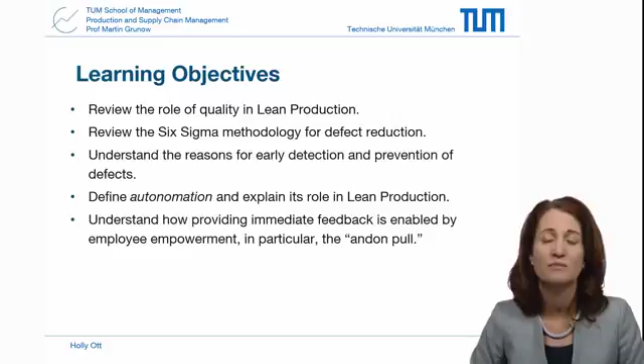The learning objectives are to review the role of quality in lean production and to look again at the Six Sigma methodology for defect reduction. We want to understand the reasons for early detection and prevention of defects, define autonomation and explain its role in lean production, and finally understand how providing immediate feedback is enabled by employee empowerment, in particular the andon pull.

At the beginning of this course, we discussed how lean production tools are used to reduce the three M's: Mura, inconsistencies; Muri, overburden; and Muda, waste. And we discussed how the objective of these lean tools is to create continuous flow in our processes, increase the flexibility to match customer demand, and eliminate waste through quality and quantity control.

We've learned to establish continuous flow in the face of setup times and variability, and we've used pull scheduling techniques to achieve just-in-time production. All of these are geared towards quantity control. In this lecture, we will look more closely at quality control and how this affects our process.

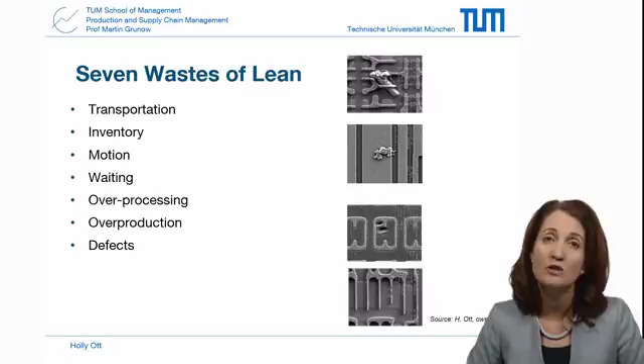We'll start by going back to our 7 wastes of lean: transportation, inventory, motion, waiting, overprocessing, overproduction, and defects. Thus far, we've looked primarily at our production in order to reduce inventory and waiting. Now we will look more closely at our last waste, defects.

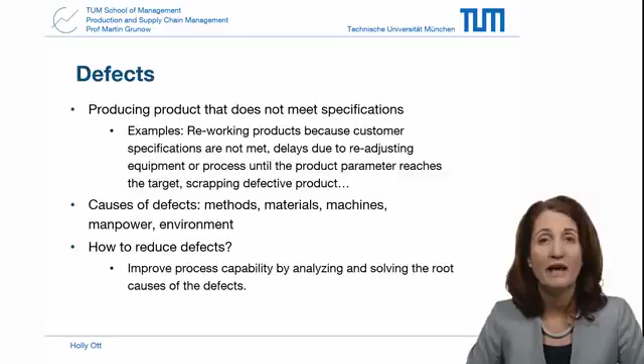Again, defects means producing product that does not meet specifications. Causes can be the methods we're using, the materials, the equipment, the operators, the environment. How can we reduce this? Well, we can improve process capability by analyzing our process and solving for the root causes of the defects.

Without recapping the topics of the first two courses, we know that Six Sigma does exactly this. Six Sigma tackles defect reduction by identifying the critical to quality output parameters, which we called Y, and identifying the factors that influence or affect these critical to quality parameters. We call these the X influencers.

Then, following our DMAIC cycle — define, measure, analyze, improve, and control — we would measure the variability of our critical to quality parameters. This was represented by Six Sigma, 6 standard deviations of that normally distributed parameter.

We would see how this compared to the allowed specifications, the lower and upper spec limits defined by the customer. Then, through analyzing the data and running experiments to improve the process, we would reduce the variability so that we would have a much more tightly controlled process, improving the capability of the process and reducing the number of defects. Defined by Motorola, a process achieving 3.4 parts per million defects has a Six Sigma capability.

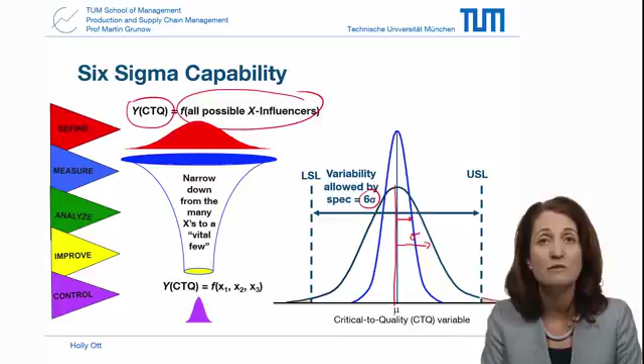Then finally, as part of the Six Sigma methodology, we would control and monitor our process. Now, why was this Six Sigma capability so important?

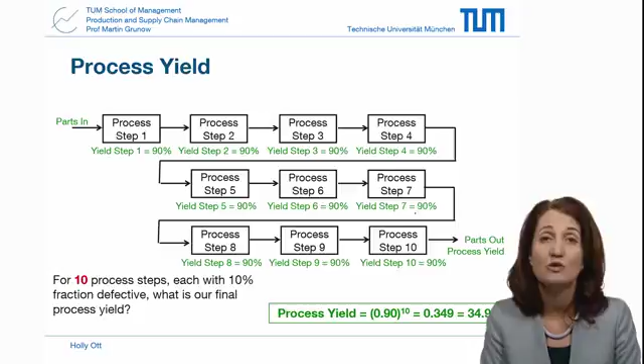Well, we also learned about process yield, and we saw that a complex process with many steps can have unacceptably low yields, even for fairly high yields at each individual step. For a product like a car with thousands of parts and processes, the Six Sigma capability is required even to achieve a reasonable final yield.

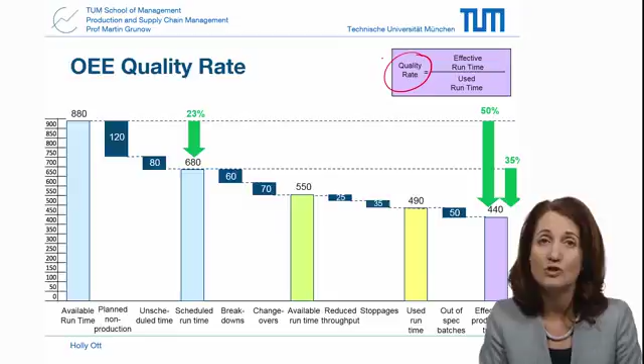We saw this again in this course in the overall equipment effectiveness lecture, so that the yield is measured as part of the OEE, where we look at the availability rate, the performance rate, and here, the quality rate. The quality rate is reduced then to losses due to quality issues, rework and scrap due to defects.

We also understood the effect of defects not only as a loss of this production yield, as this quality rate, but also as a loss of resources in our production: materials, labor, and capacity. The cost of these internal failures include the cost of scrap and rework and delay of deliveries.

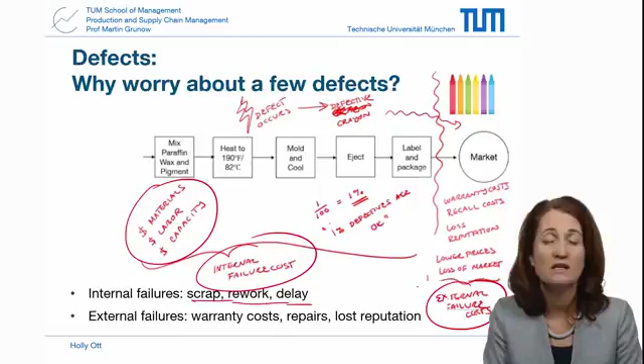Defects can also lead to external failure costs when the defective parts reach the customer. This can cause possible recall, warranty costs, as well as reputation loss.

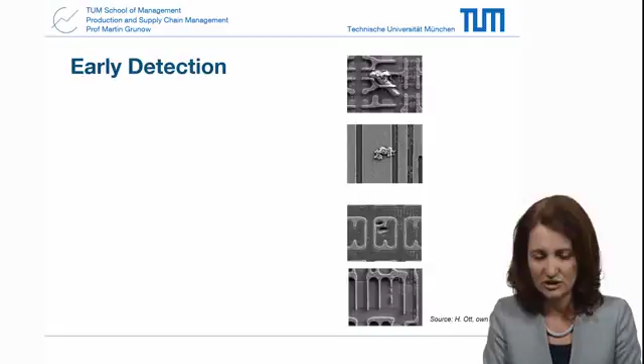Now, defects are not easy to detect. They're often very hard to measure when they're very rare and have many different root causes. But already we can see that early detection is better than late detection. Now why? If a problem is detected early, the number of defects can be reduced and the internal failure costs can be reduced.

Here we want to see how this works when we compare a push and a pull system. Now remember, in a push system, inventory is allowed to collect between the steps. So for example, if step 1 is producing good parts,

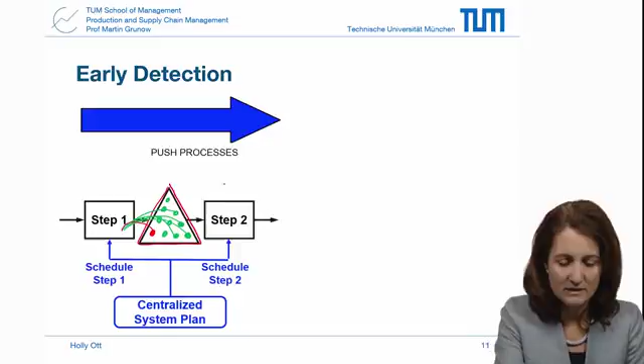but the inventory is allowed to build up between step 1 and step 2. It continues to process its good parts, and then it has a problem. Step 1 has a problem, and it produces a defective part. Now, in the best case, you'll detect this defect at step 2. But because there's so much inventory built up between step 1 and step 2, all of these good parts have to be processed before the defective part will move to step 2 and the defect will be detected.

So time is going by. And while this time is going by, what is step 1 doing? Well, it's got a problem. No one knows about the problem. So it is busy filling up this inventory buffer with defective parts, which then also have to be flushed out through the system.

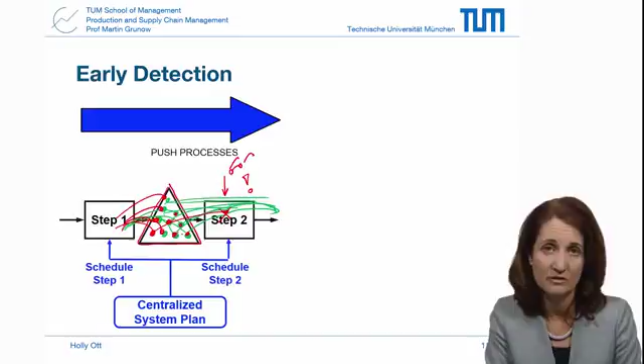Now, in contrast, in a pull system, the inventory is limited, as we saw with Kanban cards, with limited inventory between the steps. If an activity producing starts to produce a defect, the time till detection will depend on the amount of inventory between the steps. And since this is limited in a pull system, the detection will occur much faster.

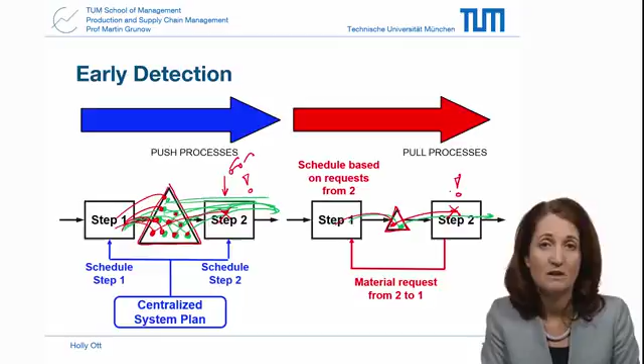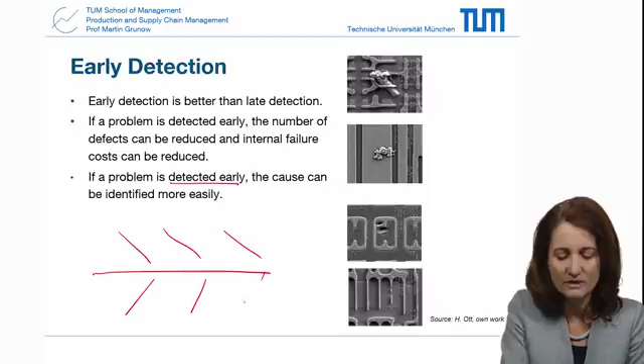As we said earlier, if a problem is detected early, then the cause can be identified early. Why? Because as we saw in course 2, when doing cause and effect analysis, for example a fishbone diagram, the inputs are limited to those processes preceding that detection. So if it's identified more quickly, you can more quickly see what went wrong in those processes.

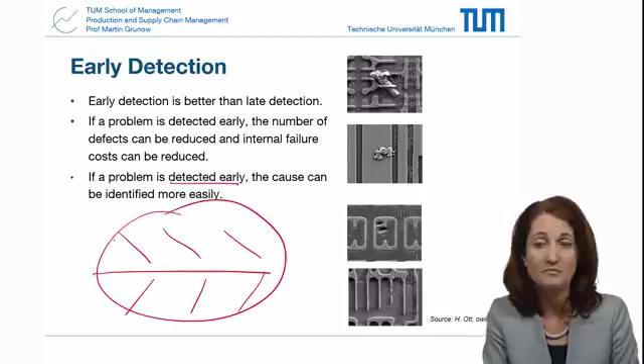But of course, prevention is better than inspection. Why? Inspection adds non-value-added costs and capital, and it doesn't remove the cost of scrap or rework. Inspection is never perfect; defects can slip through and cause external failures. And importantly, inspection removes the responsibility, because finding the defect doesn't occur where it happens—it's downstream from the actual problem. Inspection itself can also become a bottleneck in your system.

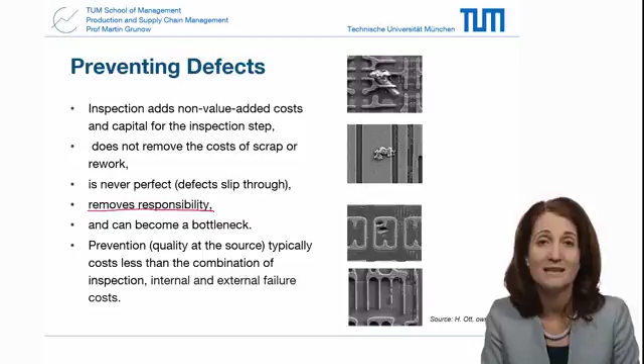Better is prevention, quality at the source. Prevention typically costs less than the combination of inspection, internal and external failure costs. So how can we achieve this? One of the most well-known tools of lean production are built-in tests that signal problems automatically and immediately.

This brings us to the topic of autonomation. As we said in the first session, Toyota Motor Corporation grew out of Toyota Automatic Loom Works, founded by Sakichi Toyoda. A particular feature of the looms was that they would stop automatically as soon as a thread broke—in other words, a defect would stop production immediately.

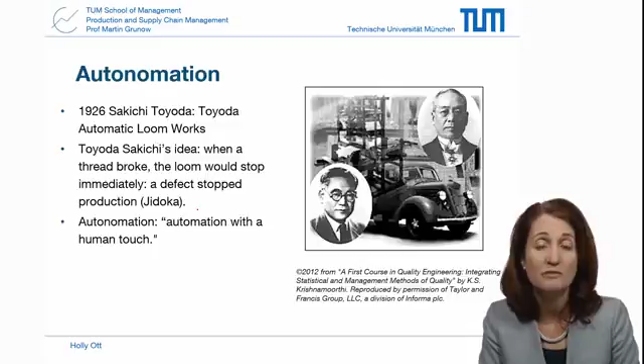This affected the principle of jidoka, or quality at the source, described by Taiichi Ohno as autonomation, or automation with a human touch—meaning a machine could distinguish between normal and abnormal operating conditions. If something went wrong, the machine would stop immediately and no defects would be produced. This emphasizes the idea of waste: with no extra inventory to hide the problem, it would be visible, allowing immediate improvement of the process.

Just a note: this is very different from our Six Sigma idea of reducing variation. Here, in lean production, no defects are even produced.

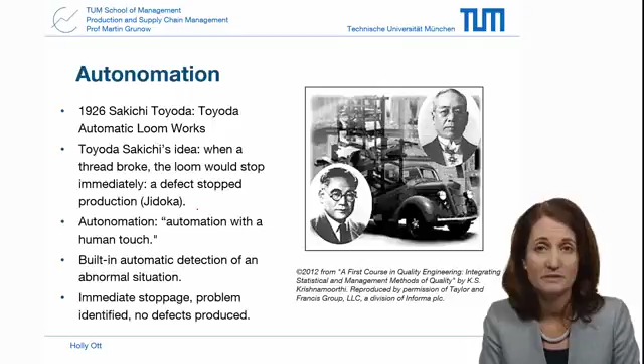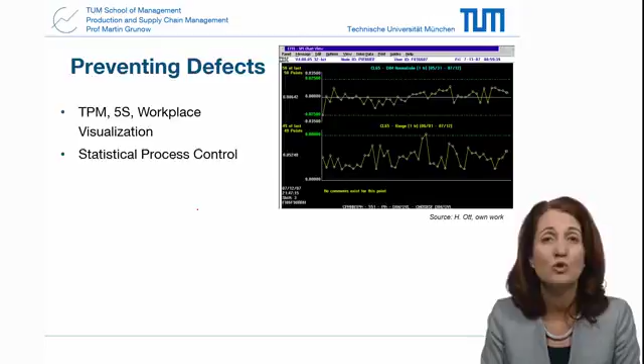We've already covered other tools and methods used in lean production and Six Sigma to prevent defects. For example, total productive maintenance enables preventive maintenance, which helps prevent defects due to equipment malfunction or breakdown. We also looked at 5S and workplace visualization, which helped standardize and organize the workplace so there's less room for misprocessing, and statistical process control, where in Six Sigma you have a control and monitoring method with a response plan for any deviations from a stable process.

Another important tool in lean production is Poka-Yoke, or mistake proofing—any mechanism that helps avoid making mistakes. Here are some quick examples: a SIM card has a cutoff corner so you can't put it into your mobile phone incorrectly, or connectors designed so the connection cannot be made incorrectly. A less high-tech example is a padlock—good padlocks don't release the key unless they're totally locked.

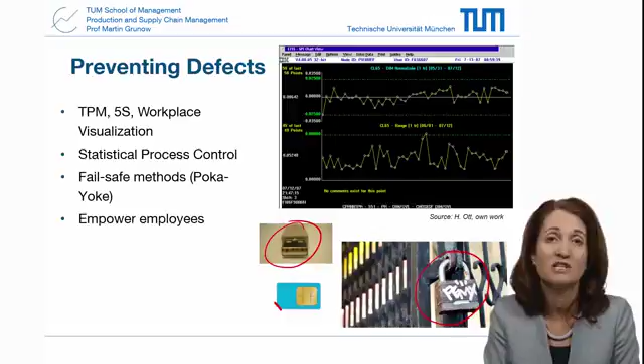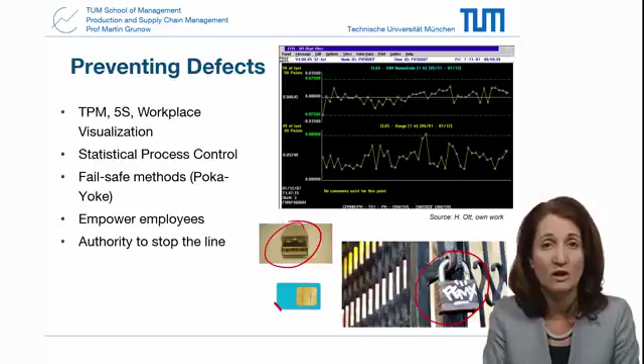Here we also want to briefly mention the critical concept in lean production of employee empowerment. In the context of preventing defects, we want to emphasize the importance of the operator's responsibility in production—in particular, the idea that to promote a culture of identifying and responding immediately to defects, operators have the authority to stop the line if a defect is detected. This again comes to the idea of jidoka, or quality at the source.

As we spoke about in workplace visualization and displaying status, the famous Andon pull is one example of displaying the status of a line. It also illustrates how employee empowerment is a strong component of preventing defects and enables systematic, continuous improvement of production. Team members are encouraged to pull the andon cord whenever there's a problem. The production line will then stop, and the team leader is alerted by lights or sound to assist the team member who has the problem. In this way, every problem is addressed immediately instead of continuing to produce out-of-spec products.

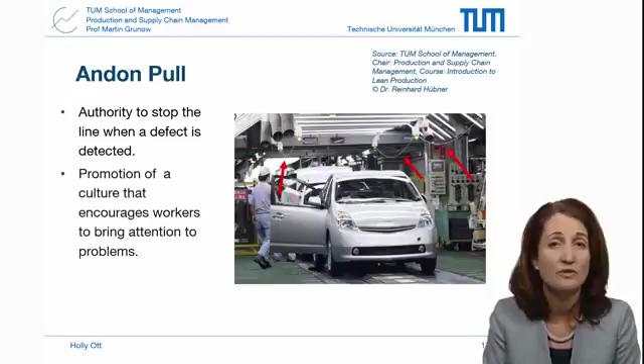So we've reviewed here in this lecture the impact of defects on our process, and we've understood that the target in lean should be to prevent defects from occurring. Now we want to look again at the impact defects can have on our production flow.